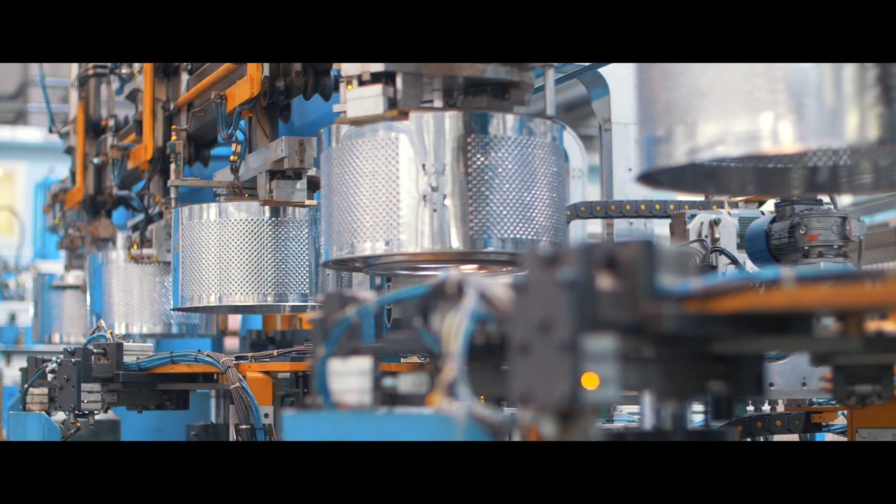Have you ever wondered how our lives are shaped by complex engineering processes and colossal process plants that run day and night without active human control and intervention? From the foam in our sports shoes to the detergent we use to wash clothes, the deodorant we spray after a workout, and the gasoline that fuels our cars, all these are directly or indirectly produced in such process plants.

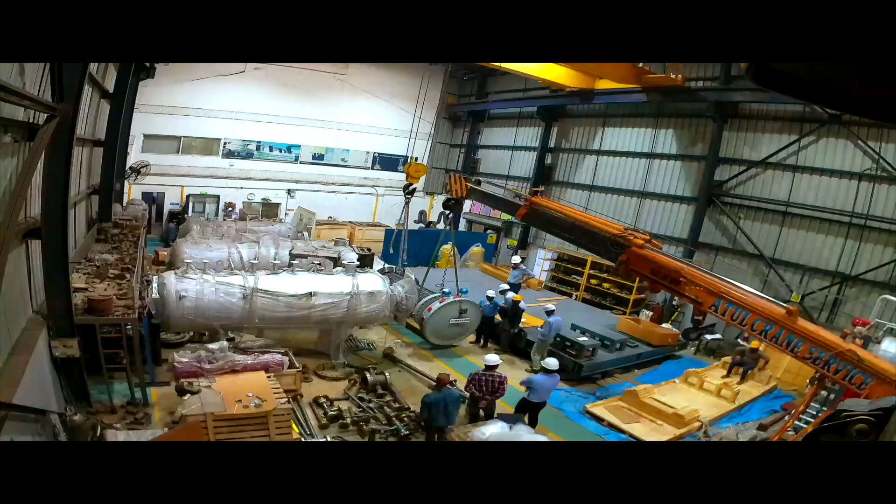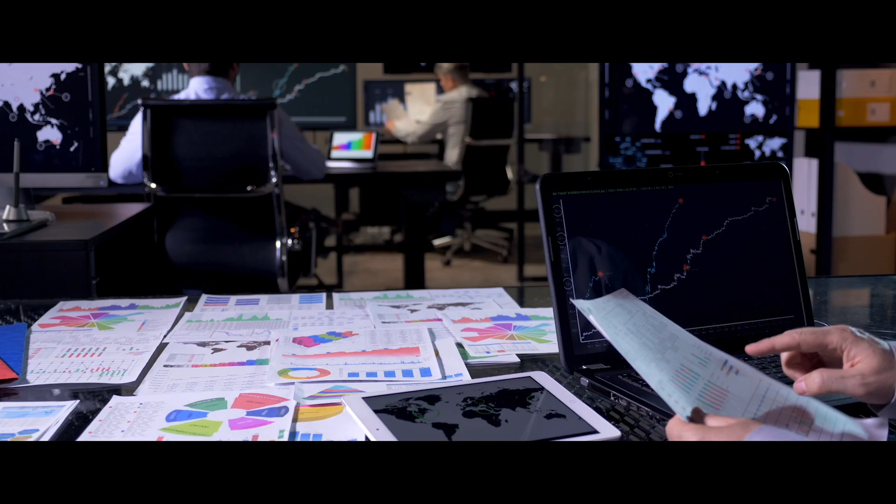These plants require a great deal of meticulous planning to ensure safe and timely completion. Setting up such a process plant is a complex task, involving not just hundreds of suppliers, consultants, and service providers from across the world, but multiple internal verticals and several stakeholders. With billions of dollars invested and sales orders in the pipeline, plant owners don't want to leave anything to chance.

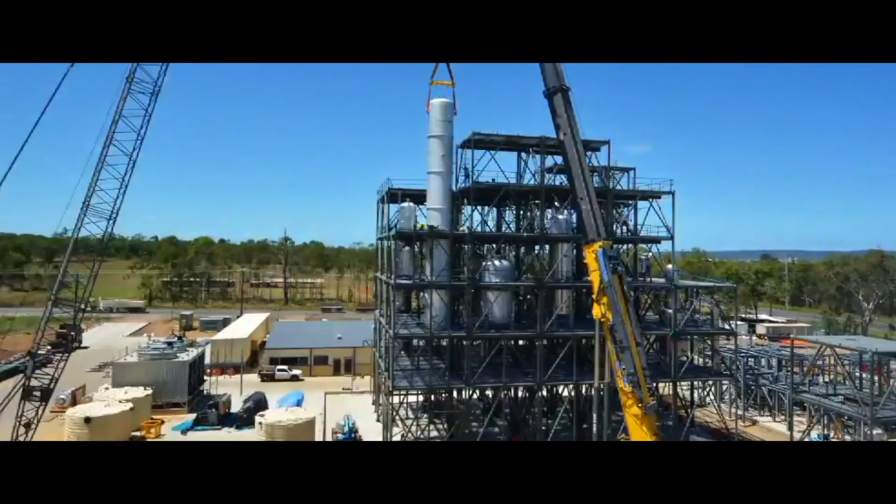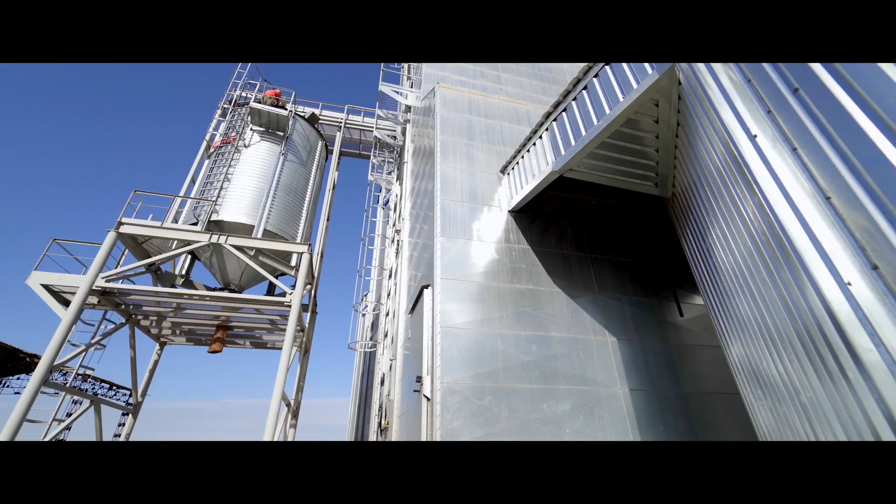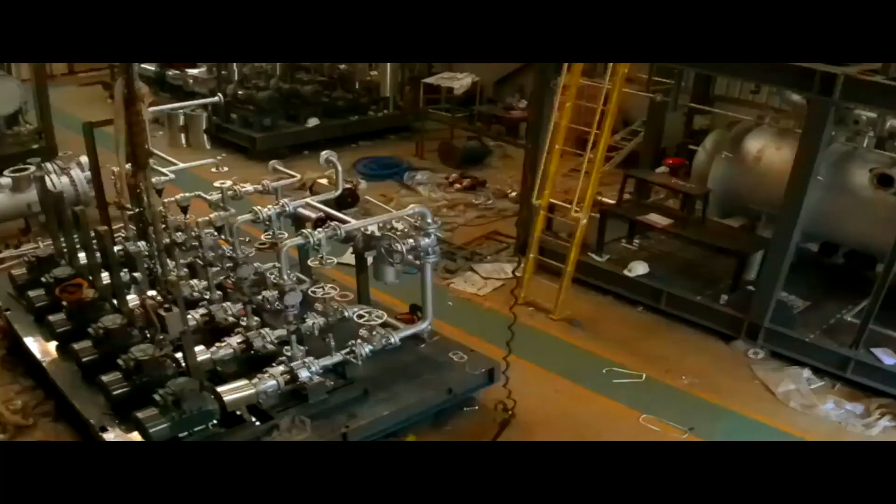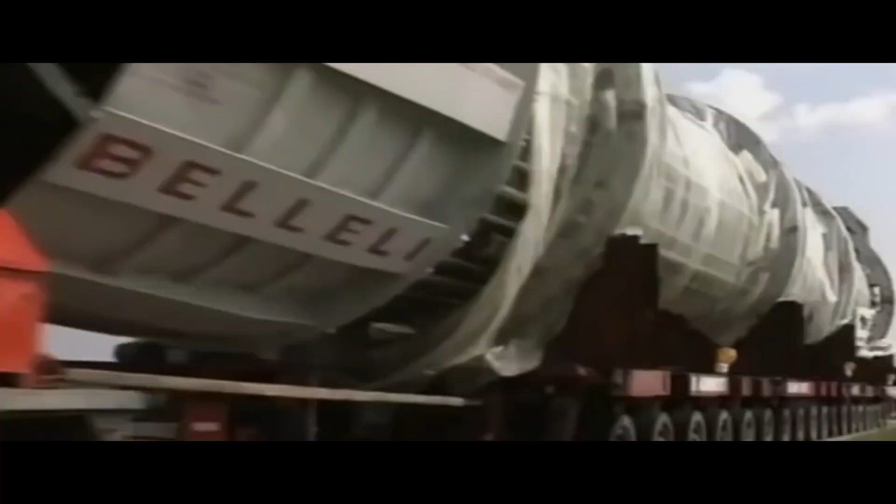These challenges, along with recent technological and engineering developments, have resulted in greater interest towards a concept called modularization of process plants. While modularization itself is possibly as ancient as human civilization, modularization of large and complex process plants is a modern engineering technique used to break down a plant into vital working components and manufacture them individually at off-site locations. The individual units are customized or pre-assembled according to project requirements and transported to the project site for quick installation and commissioning.

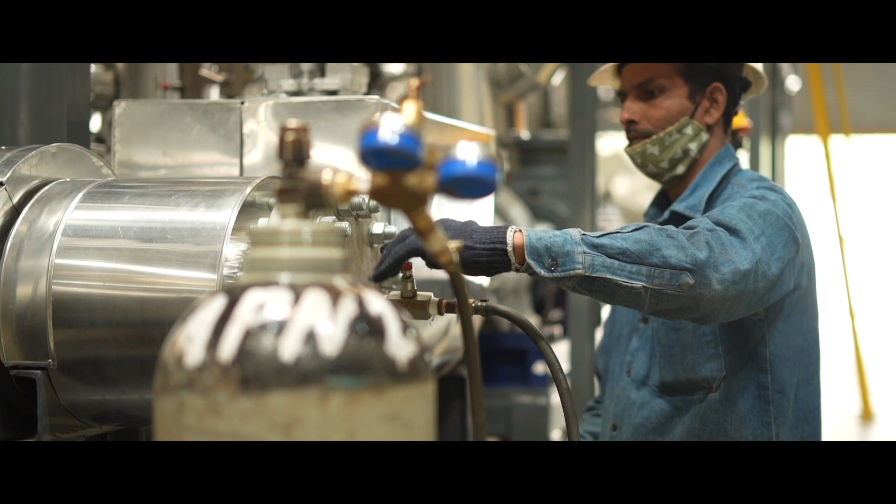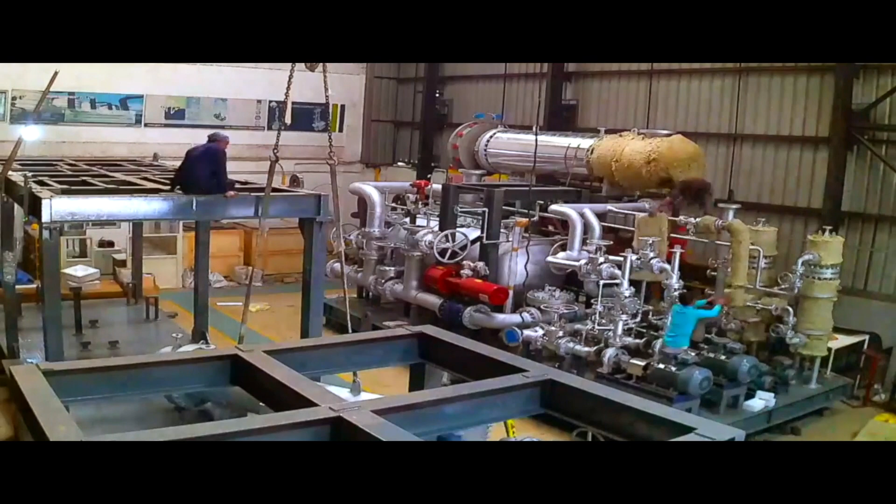Building such different blocks or modules of a process plant allows plant owners to save time, money, as well as human resources. Let us now see how this concept of modularization can be applied to a complex kerosene distillation plant.

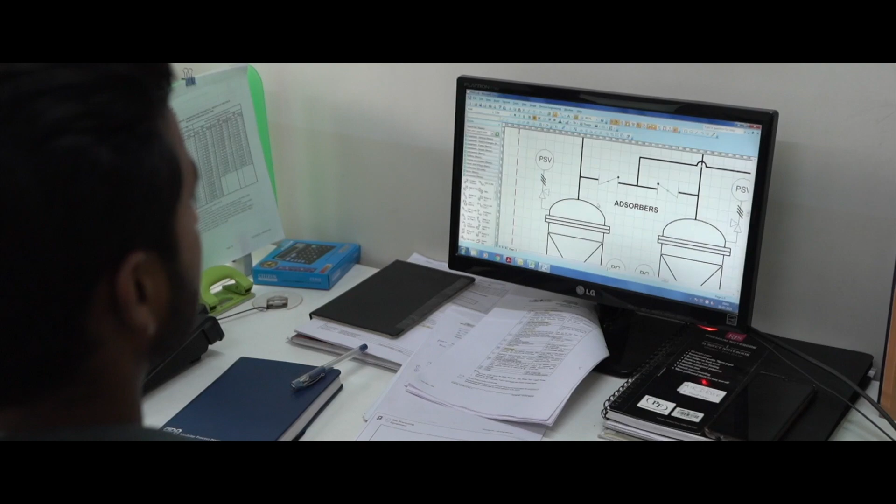This plant is located in Kuwait City. The process designer is from Houston, Texas, and the modularization has been done in Pune, India. The most critical part of the modularization process is to develop a P&ID, which helps to easily distribute the equipment and components into self-contained skids. The development of a detailed 3D model follows.

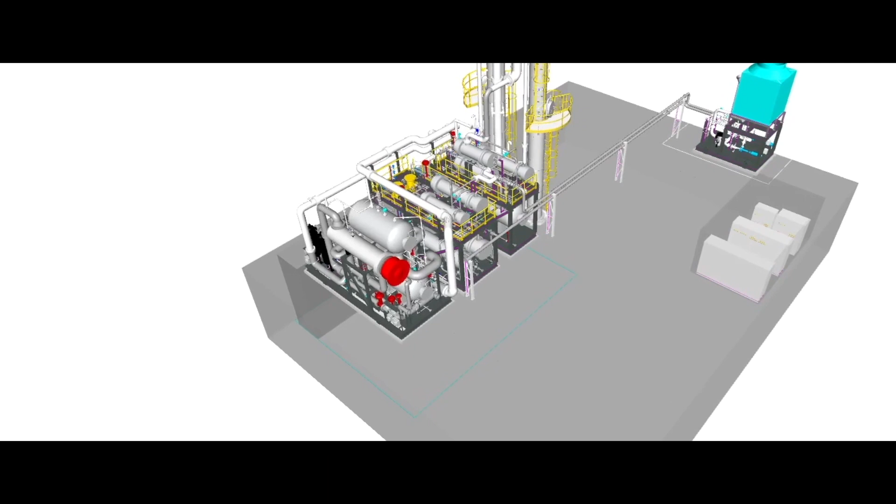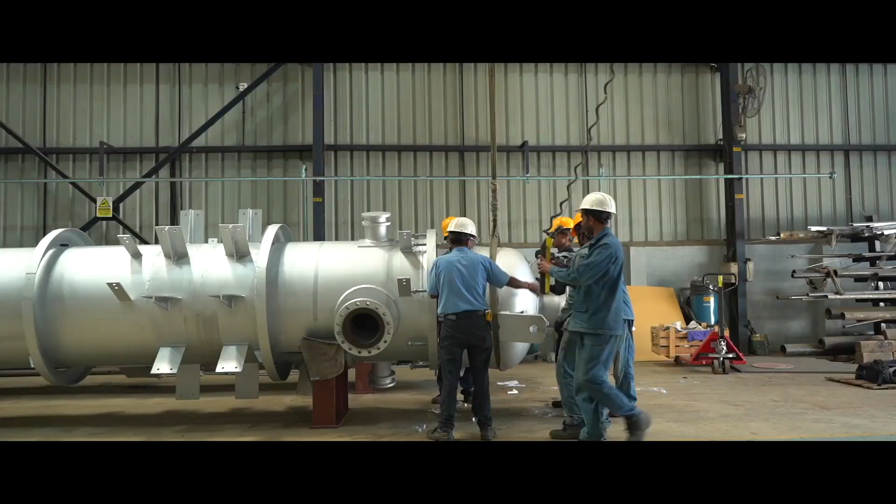This is a kerosene purification plant using the distillation process. Due to height restrictions applicable at the site in Kuwait, the distillation tower had to be divided into two separate towers which operate in series.

In line with design concepts of modular process plants, process and utility flows are divided into various skids. There are 4 process skids and 2 utility skids. The feed and the product kerosene streams are integrated in the transfer skid.

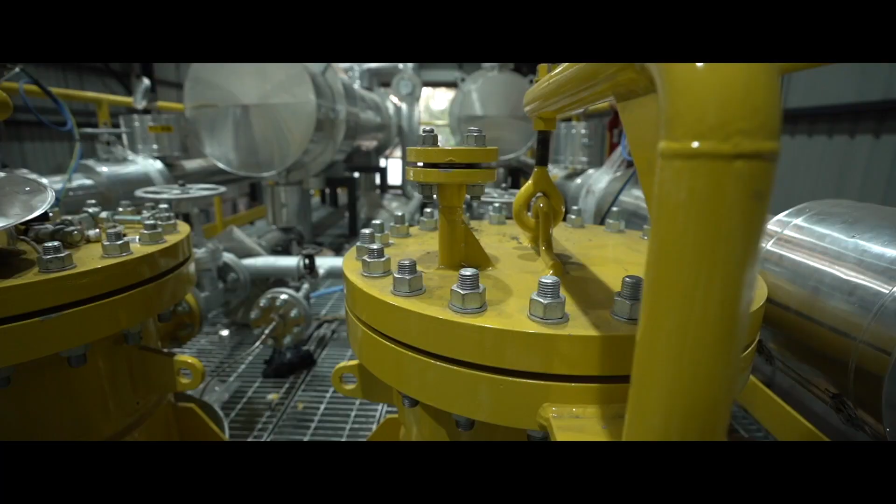The feed kerosene flows through a duplex particulate filter and 2 recuperative heat exchangers in series, where the hot product liquid preheats the liquid going to the lead distillation tower. The 2 product streams are further cooled by 2 water-cooled heat exchangers.

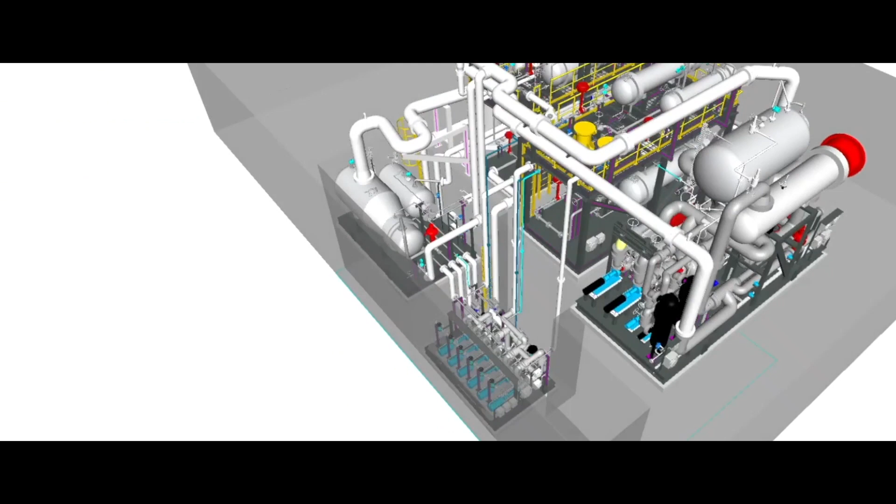The reboiler skid has a TEMA-R kettle type reboiler, where the hot liquid enters from the bottom of the lead distillation tower and is heated and partially vaporized by circulating hot thermic fluid. This skid also contains the surge drum of the lag distillation tower.

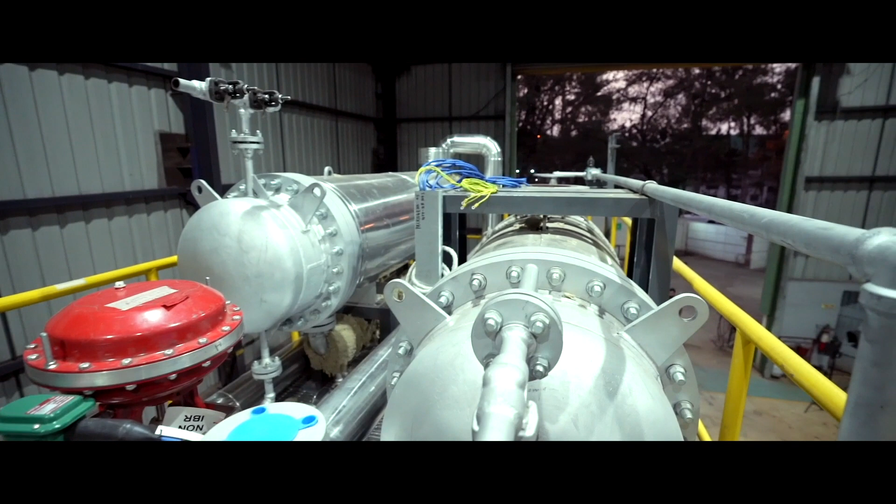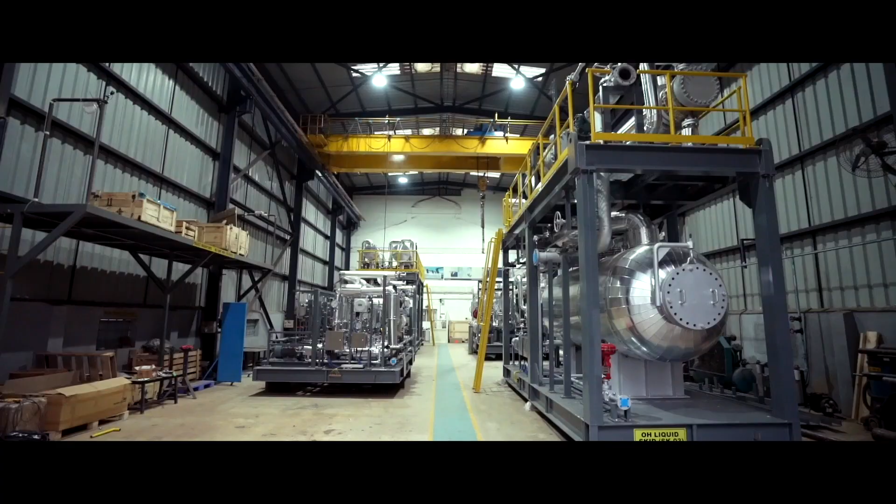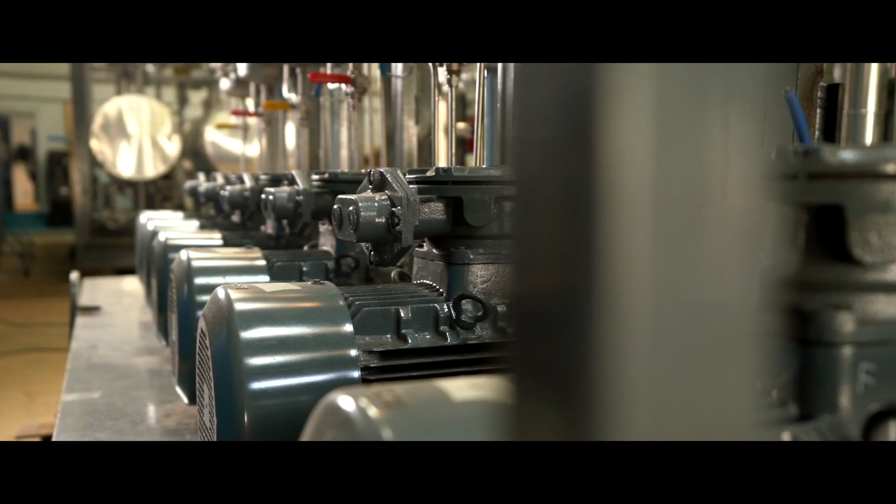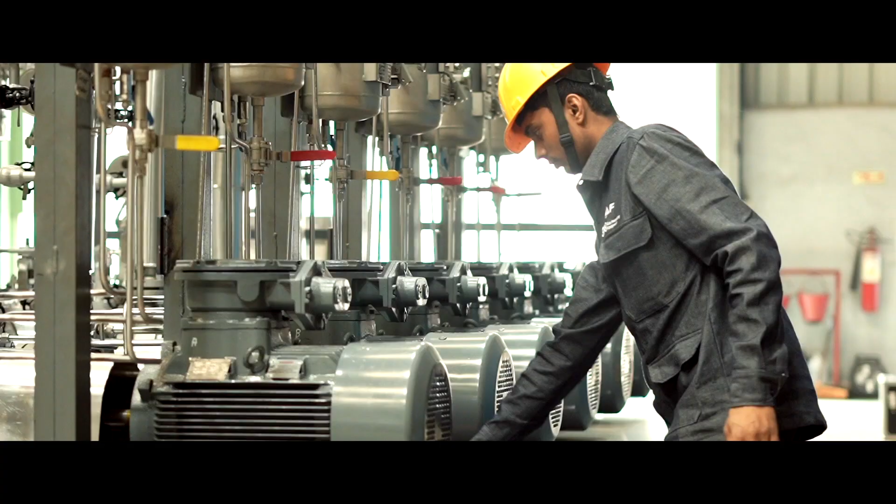It comprises 3 different API 610 hydrocarbon pumps: 1 for pumping product liquid from the bottom of the reboiler, 1 for the overhead liquid, and the third one for reflux.

The hot liquid from the OH liquid skid goes to the lead distillation tower as feed. The top overhead vapor then flows to the lag distillation tower.

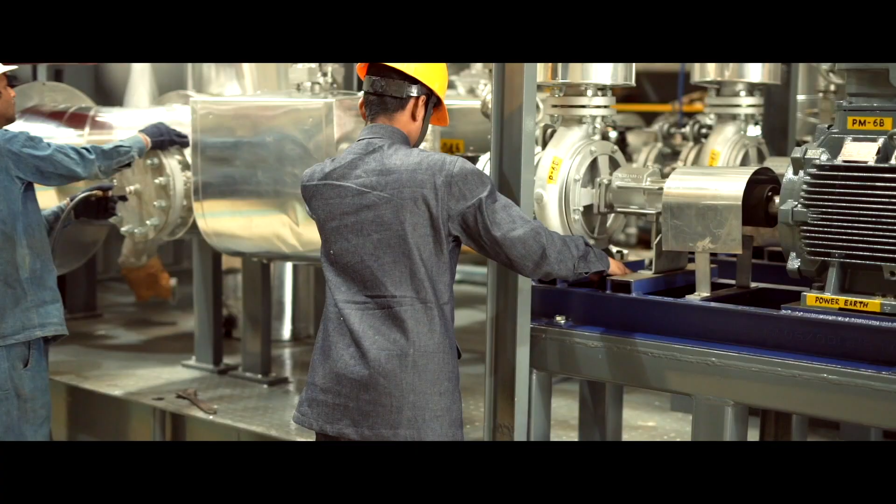The entire residual heating process is done by Dowtherm A using a 2.2 megawatt electric heater, specialized circulating pumps, duplex hot oil filters, expansion and drain tanks. These components are housed in the hot oil skid.

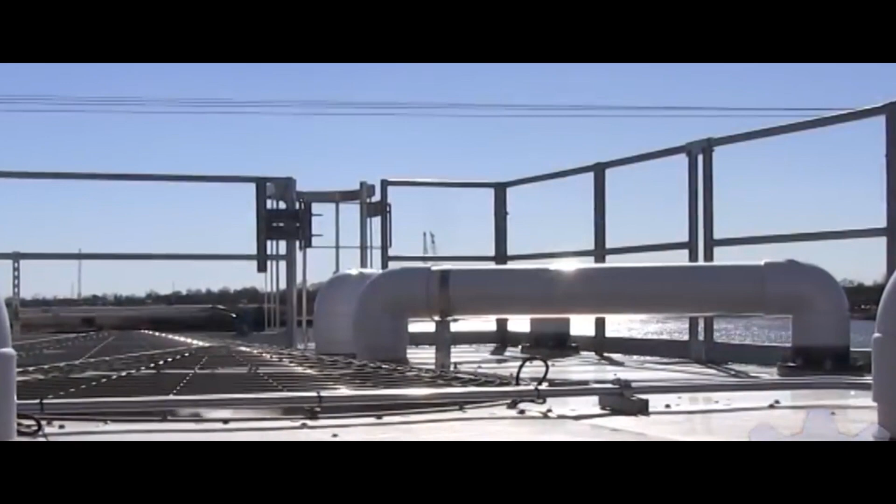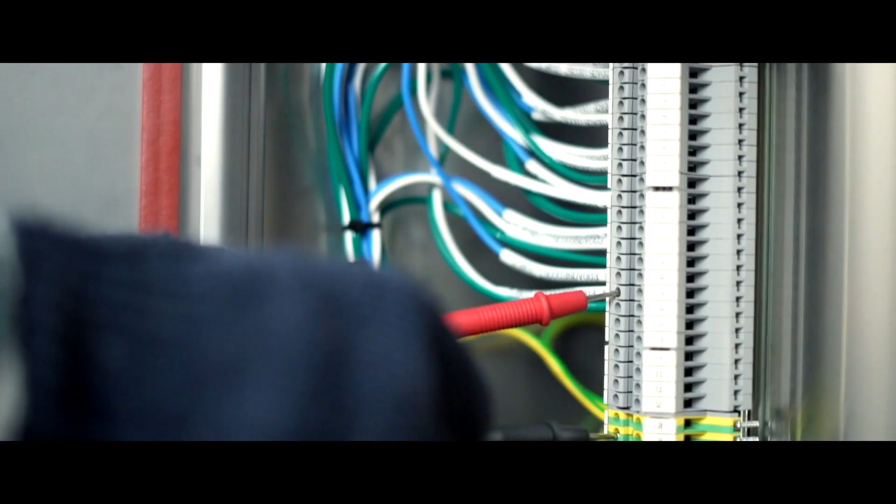The cooling system with cooling tower and circulation pumps is mounted on the cooling tower skid. This kind of design engineering is a great example of interdisciplinary coordination involving 3D modeling, static equipment design, piping, electrical and instrumentation, automation and control.

Is there any fundamental difference in the way a modular process plant is designed vis-a-vis a conventional plant?

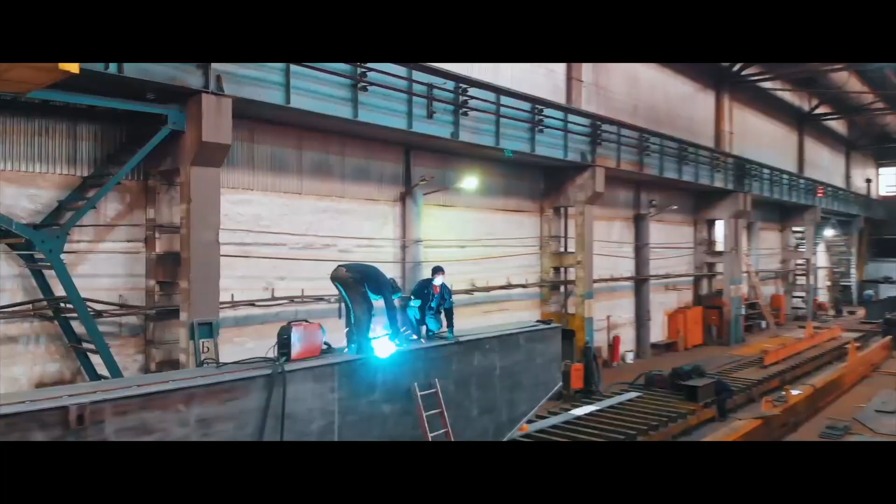We focus on small projects that can be modularized. So we do the upfront process engineering, we do the basic design, we do fabrication and modularization, and then we're able to ship that all over the world. And so we do distillation, we do gas plants, we do small refineries, we do small chemical plants.

When we talk modularization, it means various units we try to put on skids and try to do the interconnection. Sometimes it can also happen that from skid A, an outlet pipe moves over skid B to go to skid C. So the interaction is very important, especially piping, instrumentation, and the 3D modelers. They have to put the things together as per the P&ID.

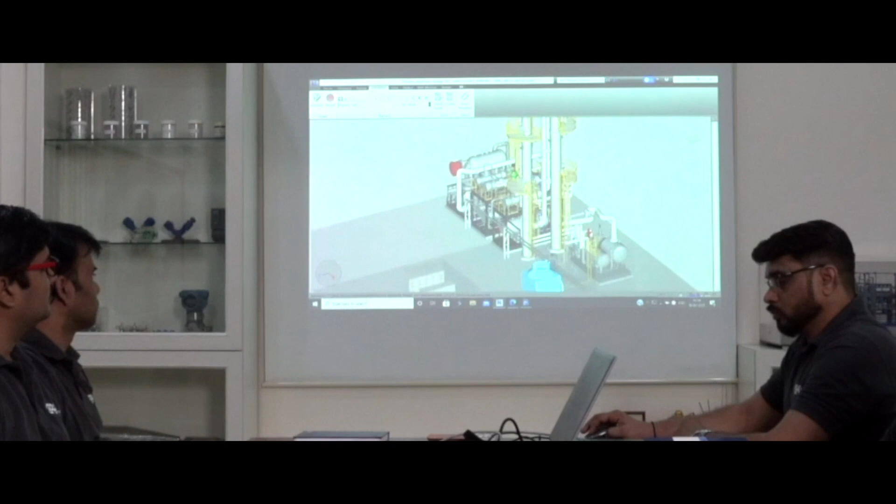Modularization requires reinforcement of structures and use of minimum ground space, which was ensured during engineering as well as the fabrication stage. Now, the design moves from the drawing board to the fabrication and assembly plant.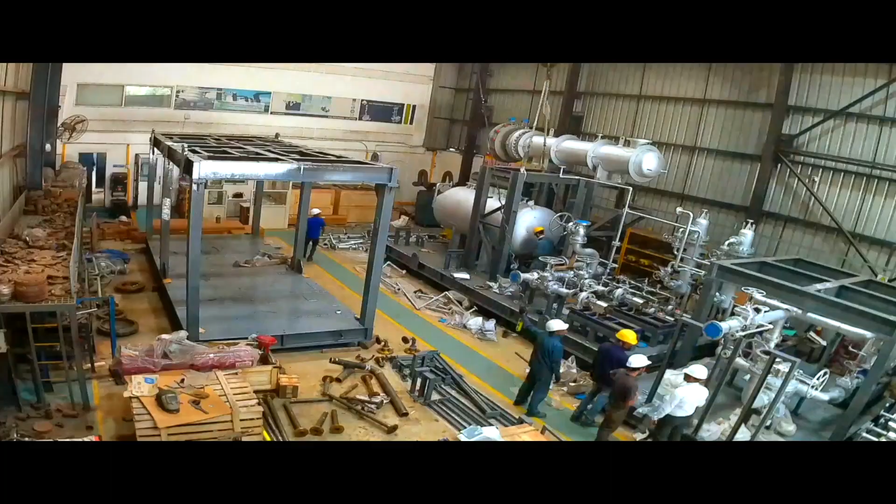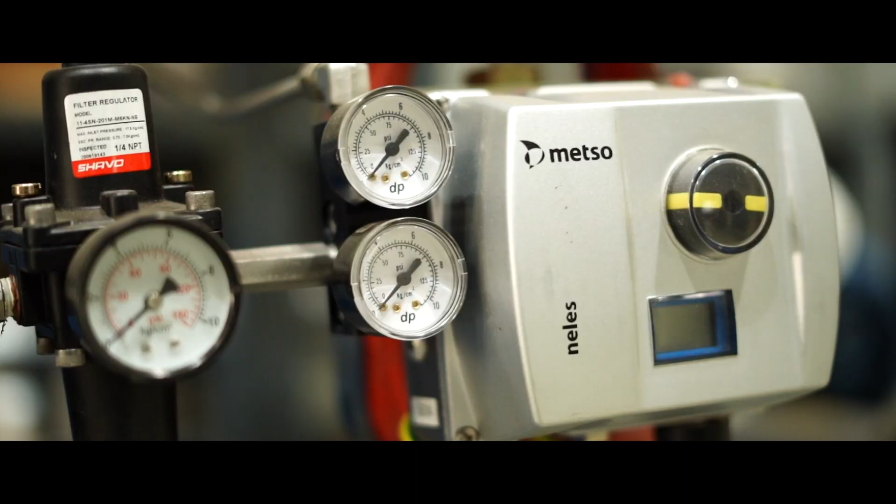The equipment, piping spools, and skid-based frames are manufactured as per fabrication drawings, painted and assembled, along with bought-out components such as valves, pumps, and instruments. Cabling and tubing within the confines of individual skids is challenging and time-consuming. Insulation of the skid equipment and piping is also quite difficult given the space constraints.

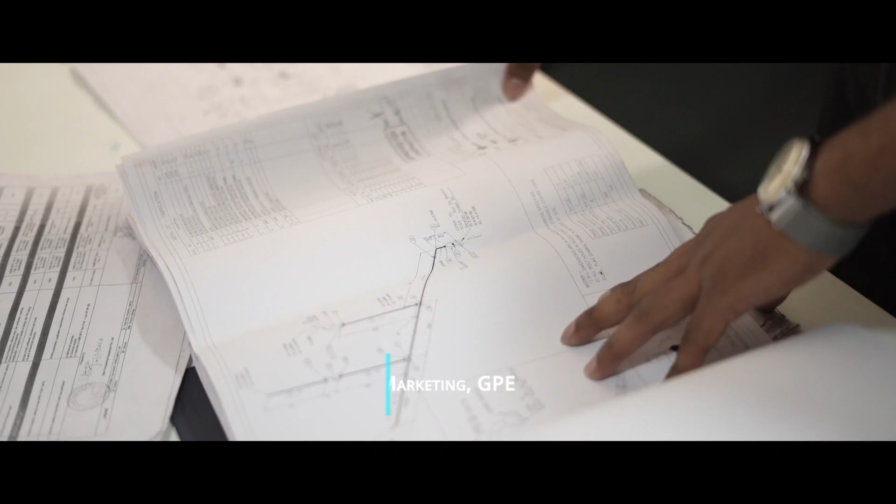How do we ensure there is no deviation from project specifications, drawings, data sheets, manufacturing codes, and standards? Since we've been doing this for many years, all our processes such as engineering, fabrication, assembly, quality control, and site supervision are aligned with the expectations of our end user. We always focus on superior build quality, starting from incoming inspection of raw material to in-process inspection as per ASME codes and industry standards. This is in addition to meeting all electrical and instrumentation requirements of hazardous areas and all applicable codes and standards for vessels and pipes.

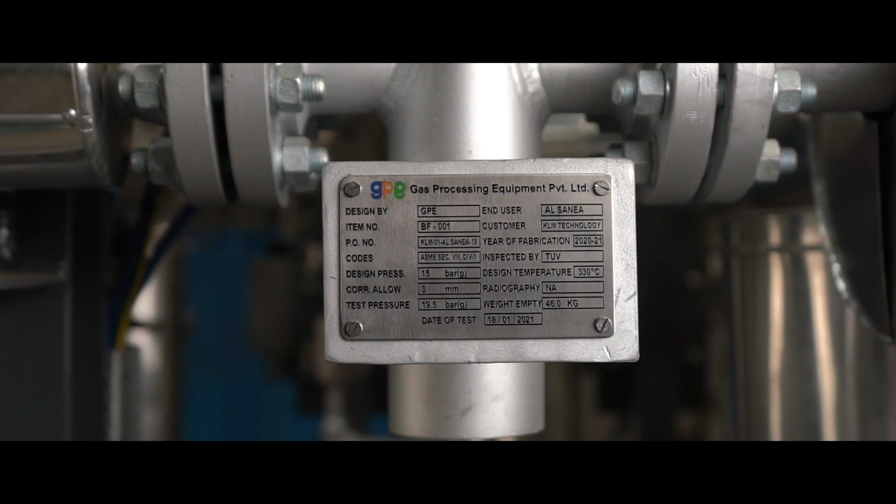Construction and design is as per ASME Section VIII Division 1, and measurement and tolerances as per API refinery standard and specification. During fabrication, we carry out in-process inspection, and the same is verified by TUV, the third-party agency. We understand that the key to success is standardization and modularization.

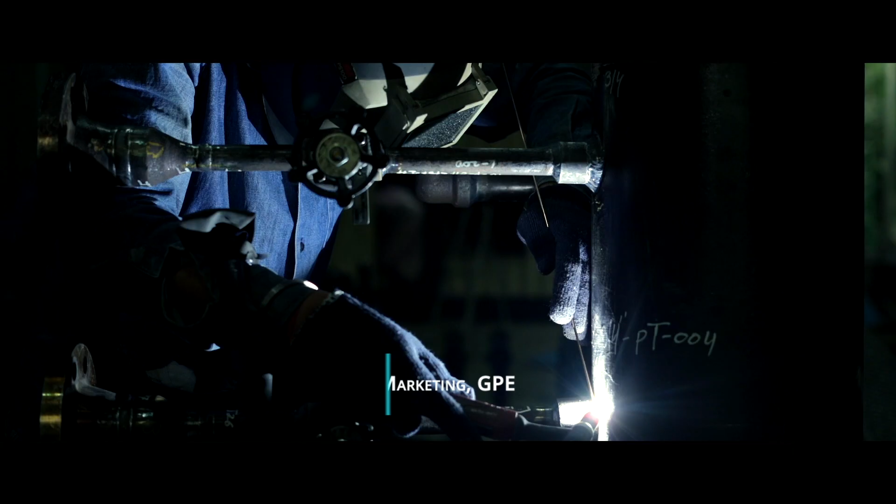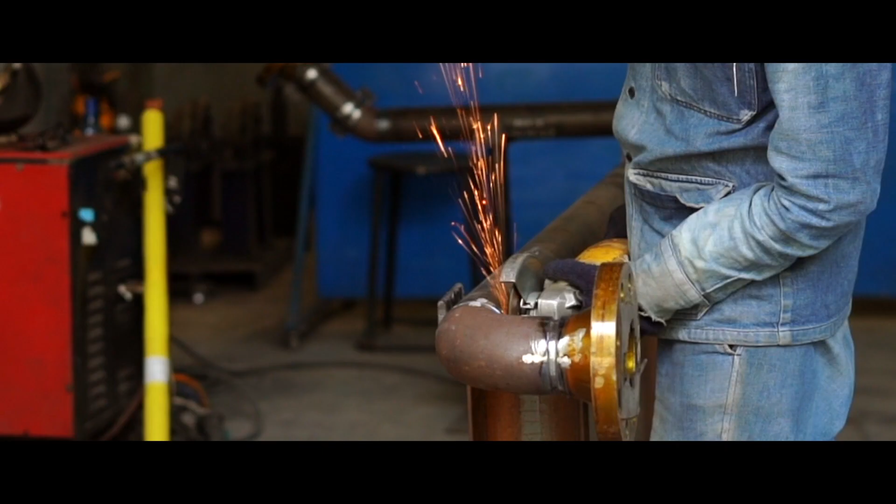Welding is one of the key manufacturing processes employed in modular process plants. How does a company control and monitor weld quality? As welding is our primary fabrication process, we are taking approximately 3,500 inch-dia pipe spool joints along with LCM and CCM joints in this project. We are providing 100% full penetrated joints without back chipping to ensure 100% RT.

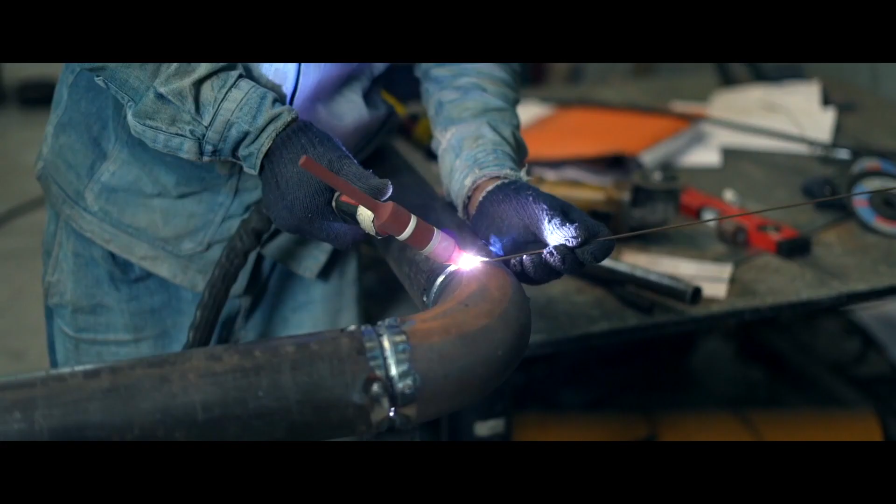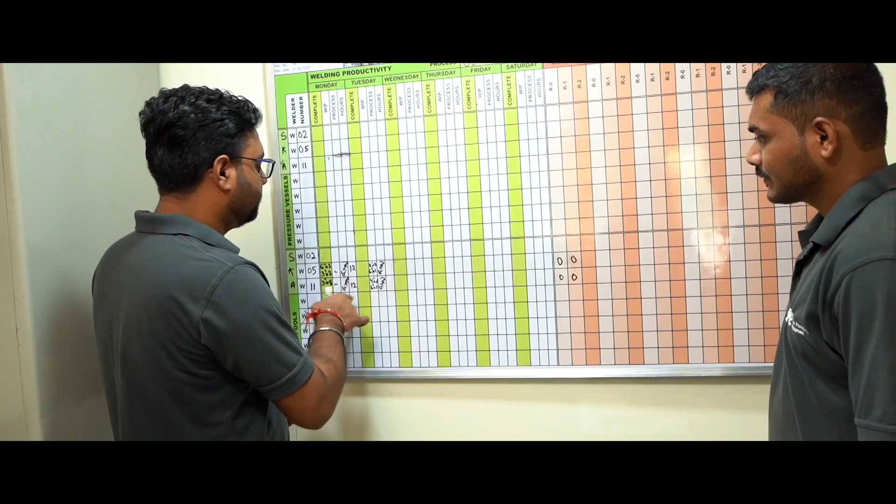We are doing FCAW, GTAW, SMAW welding processes as per ASME Section 9 and approved WPQ, PQR and WPS. We always track the record of these weld joints through our welder performance list, and we track on a daily basis how many weld joints are completed.

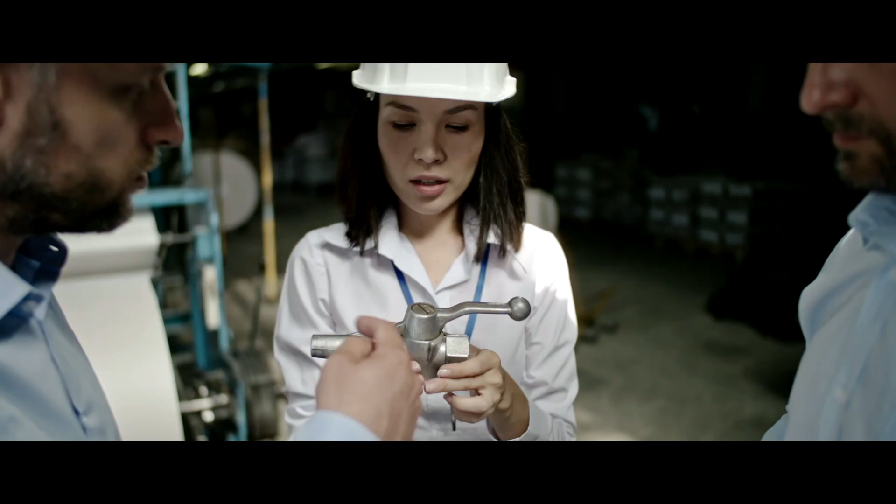Safety under normal as well as hazardous operating conditions is critical in any process plant, and this aspect is also not compromised in modularization. Our customer wanted the plant to be very safe, so we put in extra safety devices. We made it much higher rated pressure. We made it extra safe.

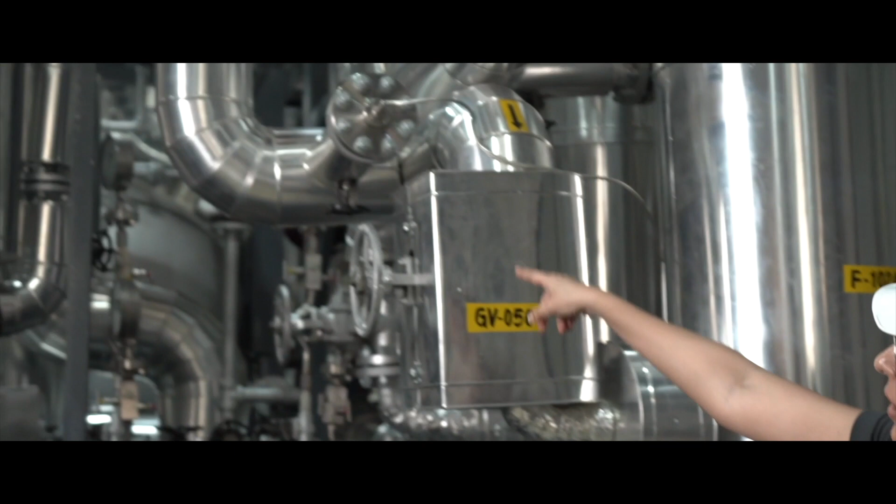This entire package is in hazardous area zone 2, gas group 2A, 2B, T3. The design temperature is 330 degrees Celsius and the pressure is 15 bar gauge, which makes it a 300 class execution. Because of the very high temperature, all the transmitters used, the pressure transmitters and the flow transmitters, are with diaphragm seal. The pressure gauges are with siphon and diaphragm seal.

As you can see, all the pipes, vessels and towers are insulated, and the insulation thickness is around 100 mm to 150 mm in various parts of the package.

Heating kerosene to a high temperature makes that kerosene very hard to pump, so it's very hard to design the proper pumps for this process. Alsana wants a very dependable process, so GPE and KLM, we took about 3 or 4 days and optimized the design of the pumps so they would be safe, economical, and work as required.

To ensure that the entire system is tripped in case of a potential fire hazard, we have LEL detectors which are installed at areas with possible leakage.

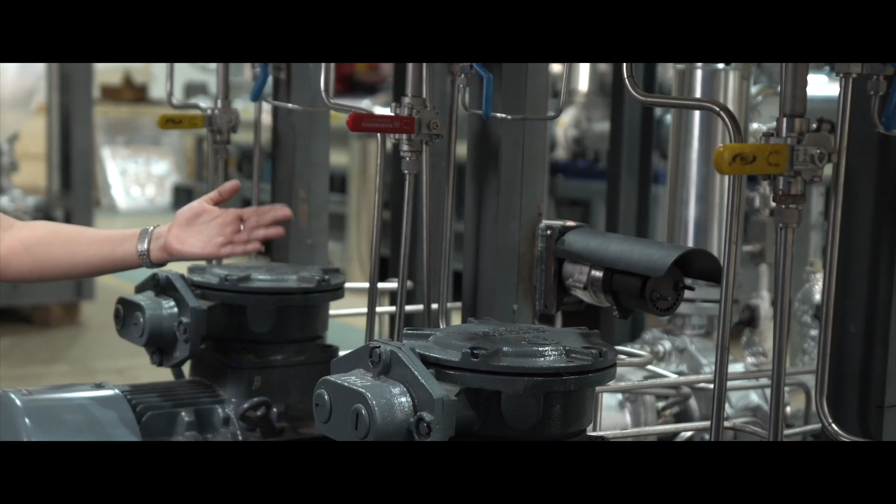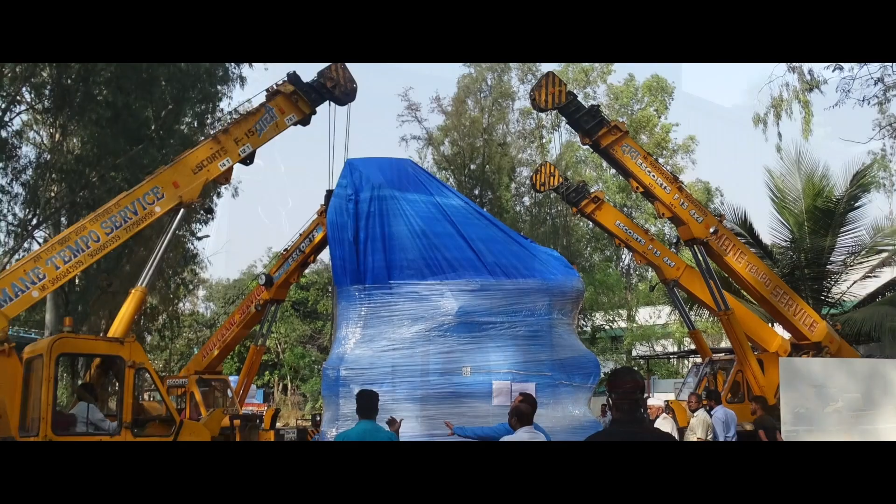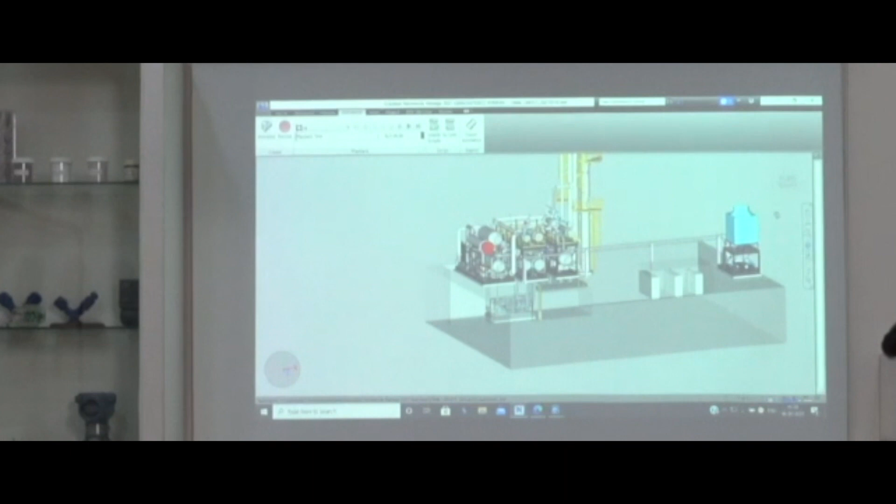While modularization offers many benefits, it also poses its own set of challenges, such as packing, dispatch, and installation of relatively large and heavy skids. This entire package is divided into 6 skids, with the largest being 8 meters in length, 3.8 meters in width, and 5 meters in height. The dimensions of the package are based on space limitations at the client site and also containerized cargo size limitations.

Having decades of commissioning experience, we understand setting up a process plant is a complex job involving multiple stakeholders. So we are offering a comprehensive factory acceptance test at our facility with the help of third-party independent agencies, engineering consultants, and sometimes our customer.

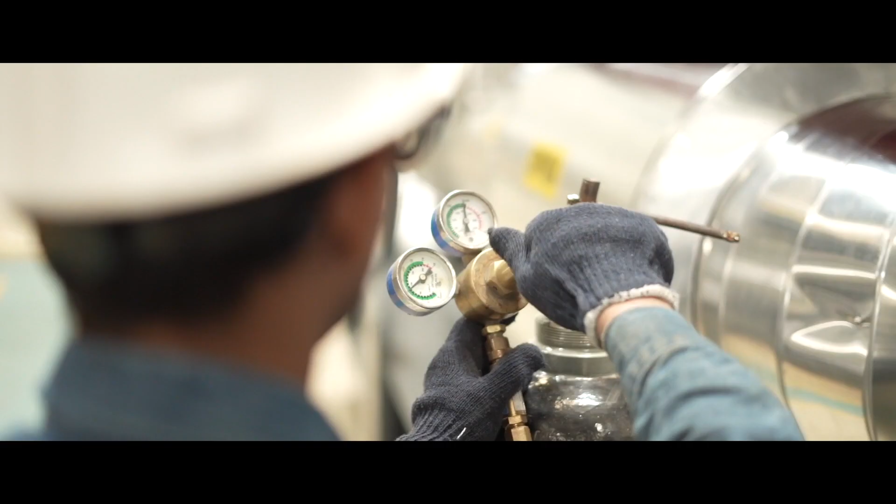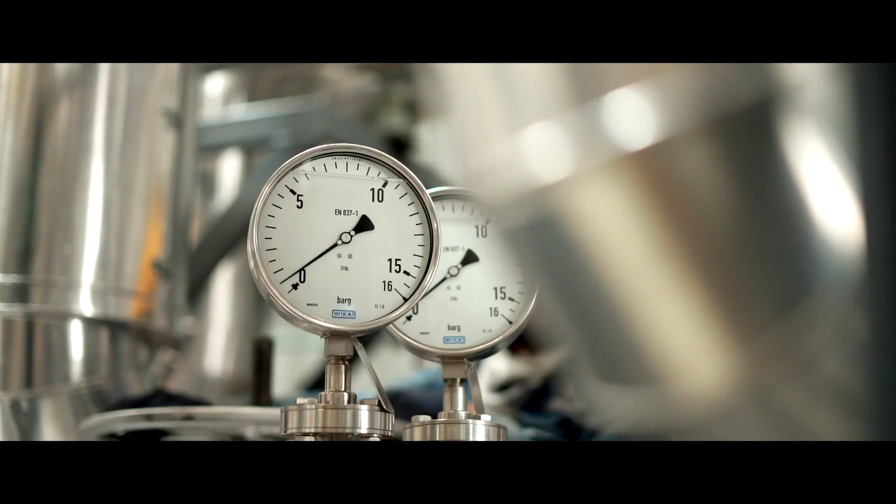During the FAT, we are doing electrical testing like PLC panel testing, MCC panel testing, and doing a pneumatic test with nitrogen. We ensure there is no leakage or any discrepancy on pipe spool lines, instrumentation joints and valves. By doing this, we always ensure there will be no issue occurring at the client's place during commissioning. So by this FAT, we always ensure the package meets our expectations.

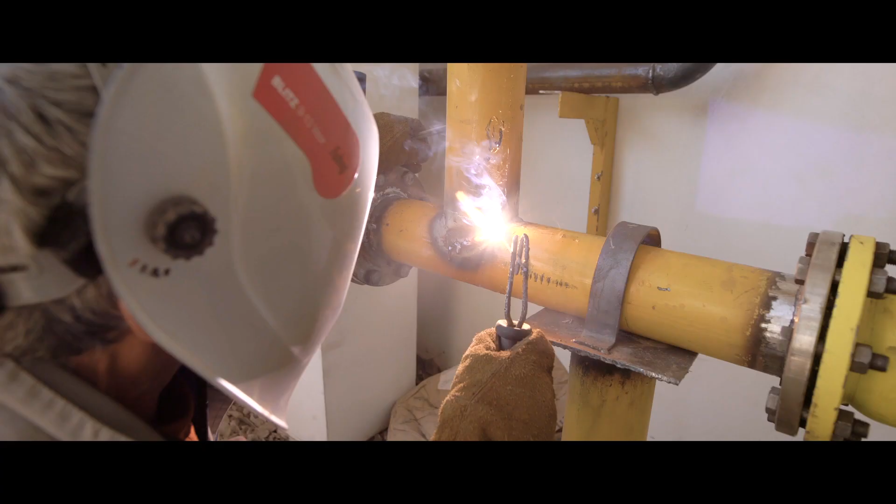The skid hookup starts right from the minute we start planning the skids. The skids are designed in such a way that any interconnection should be done from skid to skid, well planned for easy assembly at site, and all the interconnecting piping has to be delivered accordingly in not-fully-welded condition so that at site they are installed and then welded.

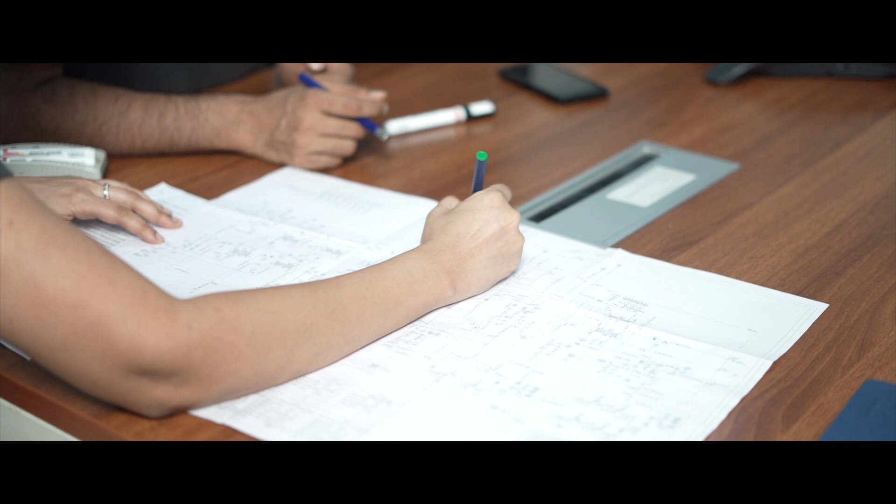For the pipe spool, we are marking an IPTP point with reference to the P&ID to ensure there will be a smooth commissioning activity at our client's place.

And I've been lucky. I've got to fly all around the world.

I've been to Africa, India, the Philippines, Indonesia, Malaysia and Thailand to start up chemical plants. So I'm comfortable that we'll be able to commission this plant safely and reliably.

With that level of experience in commissioning, GPE will bring their programmers, their mechanical engineers, and their instrument engineers, and they will set the equipment up correctly so it can be started easily.

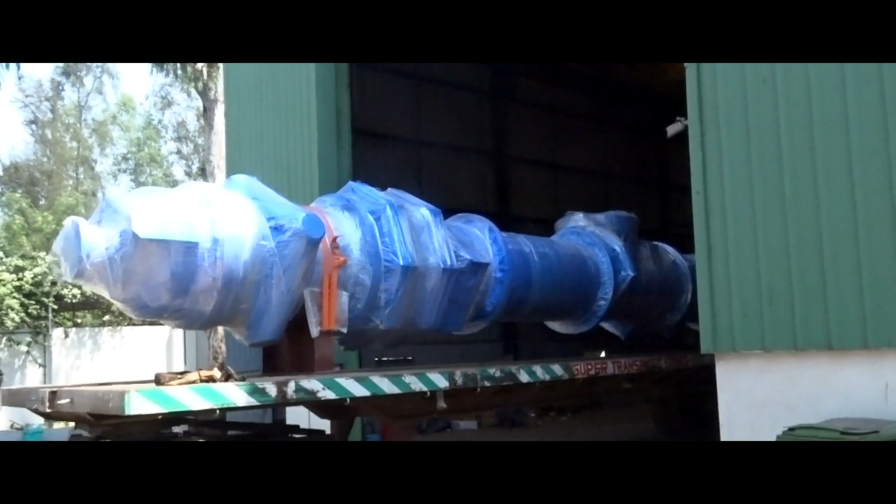Before we dispatch our parts or spare list as well as our package to our customer, we have to ensure at our facility the packing is done as per the guidelines. For the mandatory spare list, there will be a packing slip inserted into our wooden boxes, and the pipe spool is packed through HDPE packing.

Another important aspect of modularization is the deployment of a robust project management and progress tracking system, which allows the plant owners to monitor project progress on a regular basis. The crux of modularization is to shorten the overall project time.

The role of project management is basically to maintain contact with the customer, to implement and reflect the customer's requirements in their drawings and P&IDs, and to ensure the project is delivered on time.

Project management requires a detail-oriented approach where proper planning can help avoid any eventualities, even something as unexpected and unprecedented as COVID-19.

India actually shut down all physical work for several months. We were already doing video calls and Zooms and such because I'm based in the US and they're based there, so it didn't affect us from the engineering portion, but it did affect the shop portion because India shut down.

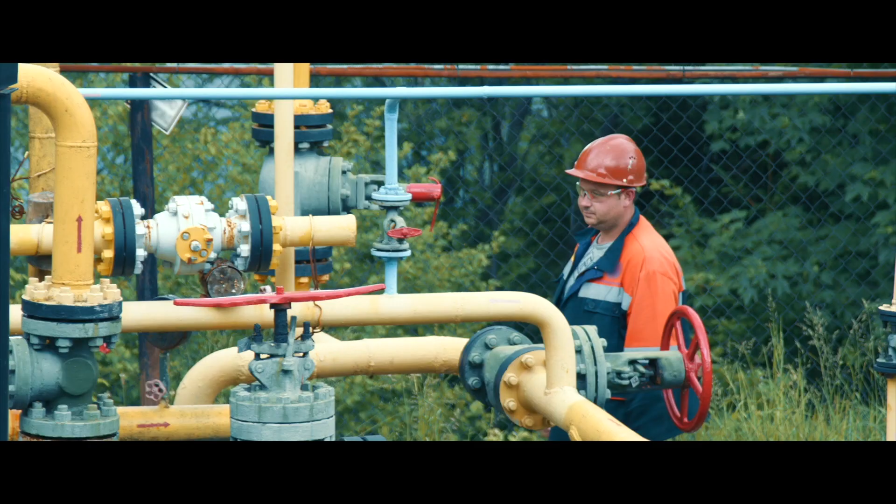As the world moves towards increased automation, modularization is on course to becoming a crucial aspect in the success of complex plant engineering and manufacturing processes. In the oil and gas industry, before that, in the year 2018, almost 50% population of the world became connected to the World Wide Web.

Because of that, a lot of modern technology has emerged, like cryptocurrency, Internet of Things, and artificial intelligence. Because of these forces, a faster response was demanded by the market, and that similar trend has also emerged in the oil and gas sector.

I personally feel that down the line, in the next 5 to 10 years, a lot of modularization will start, especially for small and medium plants. Large plants can partly be modularized, but partly have to be built on site itself.

We believe that small chemical plants, small refineries, small natural gas plants, glycol dew point plants, and amine treatment plants represent a wide range of chemical plants that can be modularized.

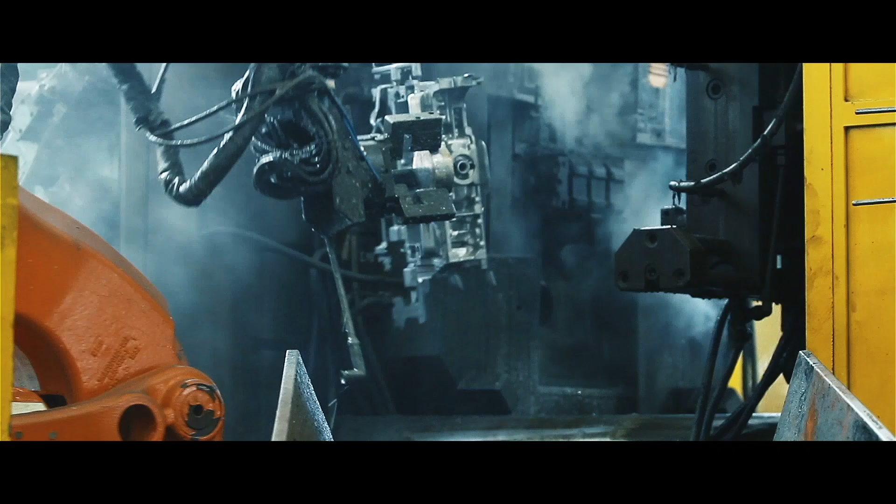While technology might have taken a rover to Mars or heralded an era where machines talk to each other as well as to humans, nothing is possible without human imagination and collaborative effort.

We follow a culture of inclusiveness, where be it a draftsman, an engineer, a manager or a director, everyone has their say in process improvement and bringing their unique ideas to the table. Modularization, like any other human endeavor, depends on our ability to appreciate and manage diverse teams and skill sets.

Gas Processing Equipment is a trusted name in engineering and supply of process units, plants, skid packages, and equipment. KLM, based in the USA and Southeast Asia, mostly Malaysia, since 1995, is a technical consultancy group providing specialized services and equipment to improve process plant operability, efficiency, profitability, and safety.

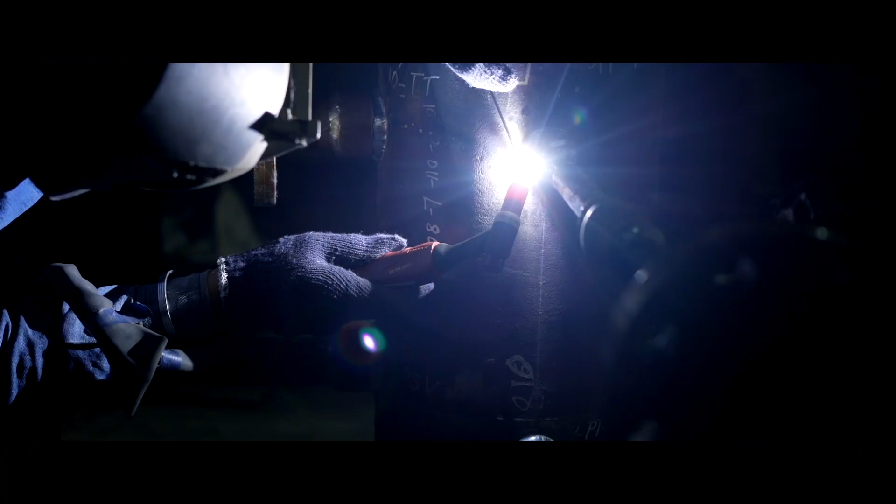GPE's core businesses are basic engineering design packages, detailed engineering design packages, equipment fabrication, modular construction, and unit commissioning. KLM's core plant businesses are process plant training and engineering design guidelines.

We have 120 engineering design guidelines covering most every piece of equipment in a chemical plant.